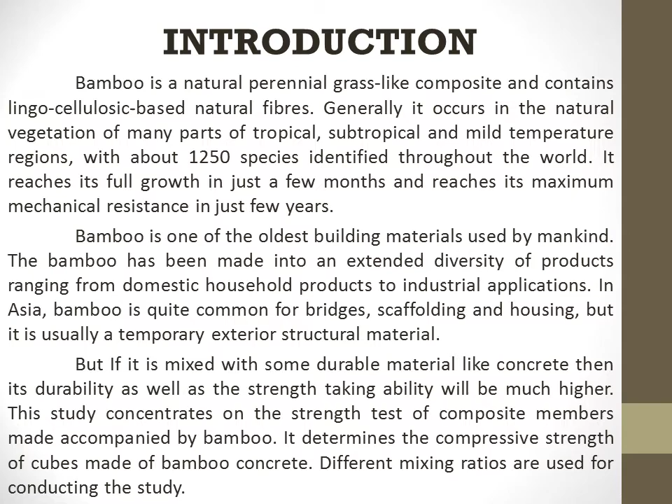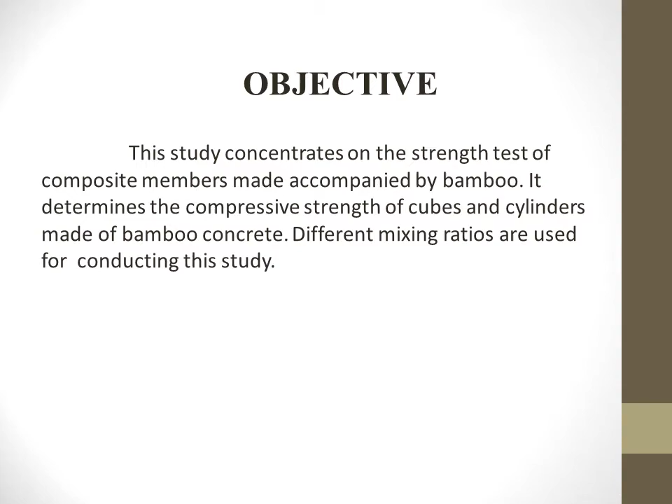The objective of our study is to find out the strength test results and compare nominal mixed concrete with fiber mixed concrete at different mixing ratios.

These are the materials which we used for concrete: Cement of 53 grade, JP branded, fine aggregate from river sand free of moisture, 20 mm coarse aggregate, water complying with the pH level, and bamboo as fibers.

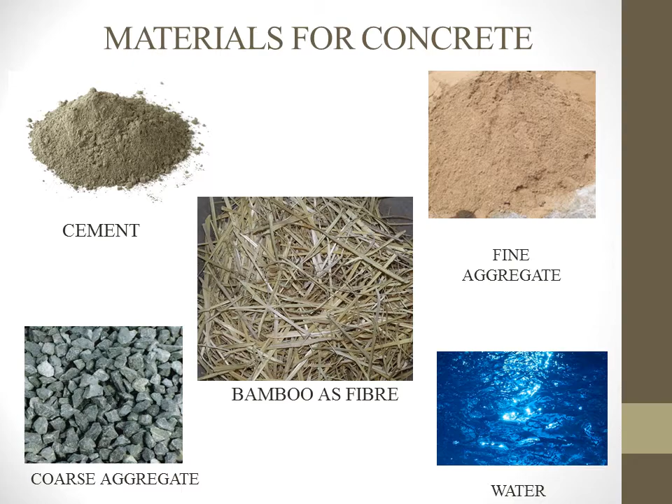This is the literature review of Harish and Vamsi Krishna in 2012 on the topic investigation on properties of bamboo as reinforcing material in concrete. They found out the various physical and mechanical properties of bamboo for use as reinforcement in concrete. He concluded that the strength of bamboo is about 125 Newton per mm square.

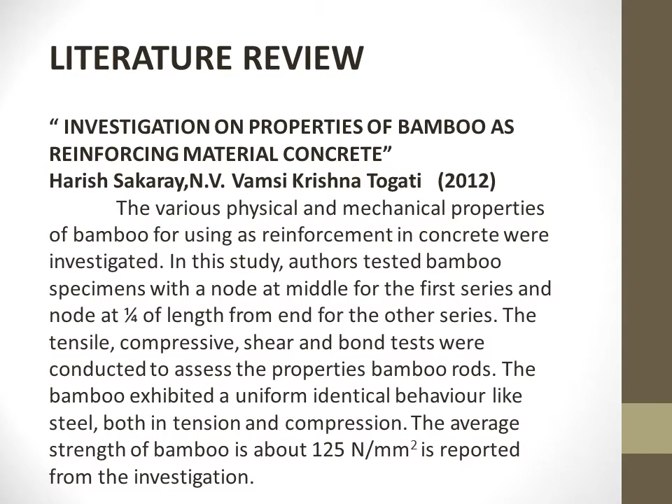This is the journal by Liu and Zjou on the title Study on the Mechanical Properties of the Bamboo Fiber Reinforced Cement Composite Materials. They cut the bamboo into 10 mm, 15 mm and 20 mm length fibers and mixed it with concrete. He casted the cubes and put them to compressive strength test, pre-treated them, and concluded that there is an increase in rupture strength because of the pre-treatment done to the bamboo.

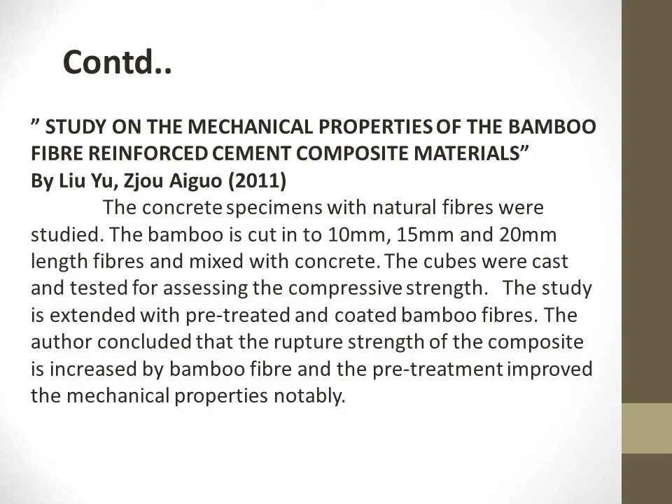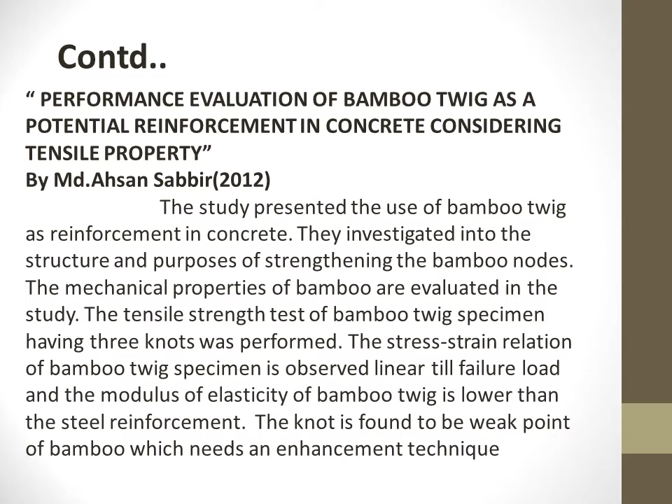This is another journal on the title Performance Evaluation of Bamboo Twig as Potential Reinforcement in Concrete Considering Tensile Property, by Md. Ahsan Sabbir in 2012. The study presented the use of bamboo twig as reinforcement in concrete. The tensile strength test of bamboo twig specimen having 3 knots was performed. The stress-strain relationship of the bamboo twig specimen is observed linear till failure load, and the modulus of elasticity of bamboo twig is lower than steel reinforcement. He concluded that the knot was found to be the weak point of bamboo, which needs enhancement.

This is another journal on the title Durability Analysis of Bamboo as Concrete Reinforcement by Lima in 2008. The analysis investigated the durability of bamboo used for concrete reinforcement. He found that the average bamboo tensile strength was 280 megapascals without node and 100 megapascals with node.

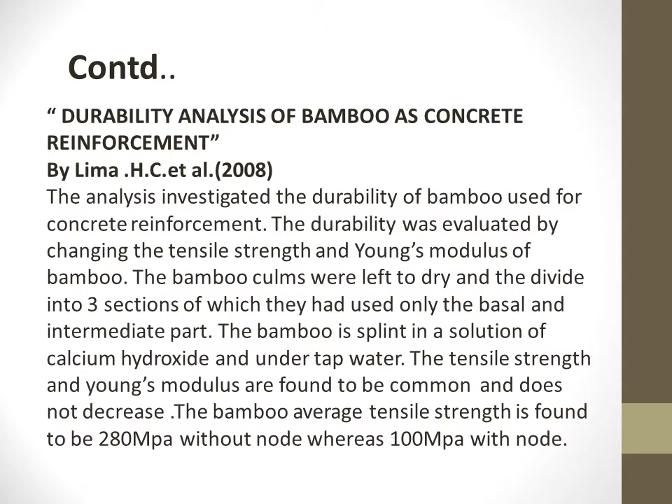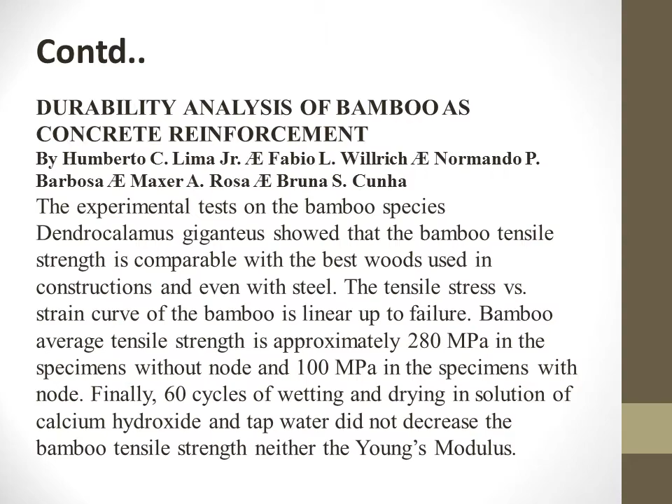Then he wanted to find the durability of that bamboo fiber. He put the bamboo into 60 cycles of wetting and drying, and found that there was no decrease in the bamboo tensile strength, nor in the Young's modulus.

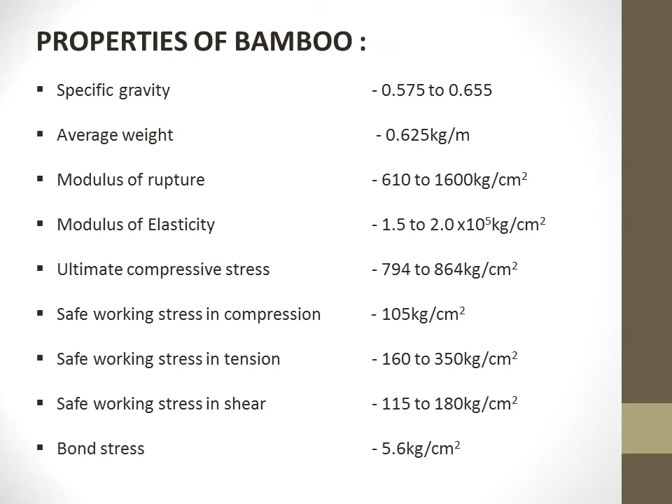This is our methodology for this experimental study. We first collected resources and studied the materials. We casted cubes and cylinders with nominal mix and fiber mixed concrete, then put those specimens through compression strength test and split tensile strength test. We then compared the results of nominal mixed concrete and fiber mixed concrete, came to a conclusion, and prepared the report.

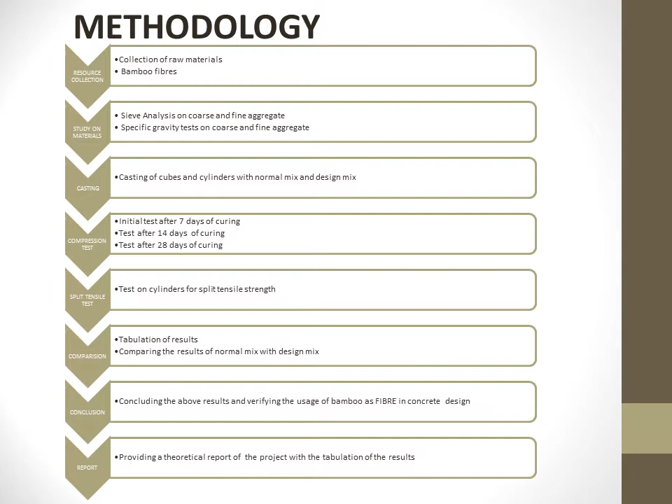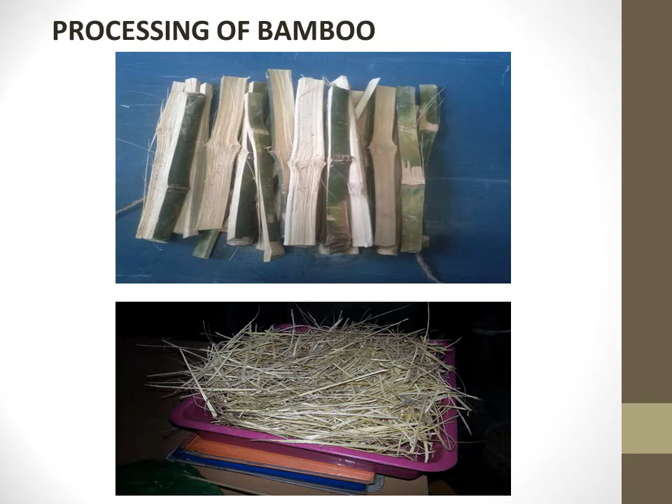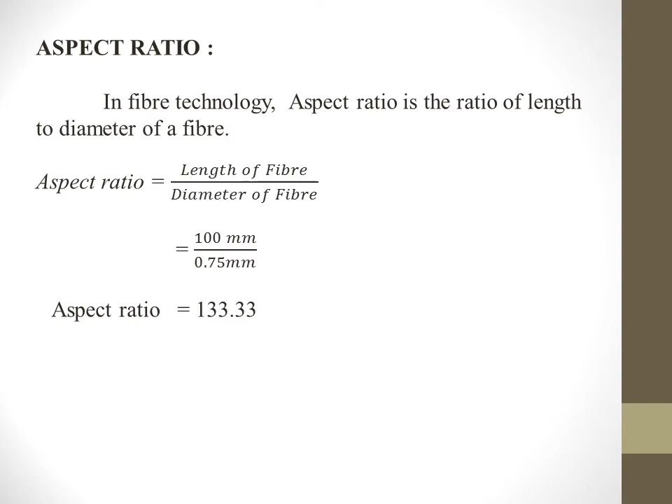This is how we had processed the bamboo. The bamboo was cut into small pieces of around 30 centimeter height, and then we had put the bamboos into fibers manually. We had taken around 10 to 15 bamboo fibers done manually, and found that the length of those fibers was around 100 mm, and the diameter of the fiber was 0.75 mm. Thus the aspect ratio was 133.33.

Then we had done the study on those materials. We had done sieve analysis for coarse and fine aggregate with the usage of these sieves which you are looking at, and also we had done specific gravity test on coarse aggregate and fine aggregate.

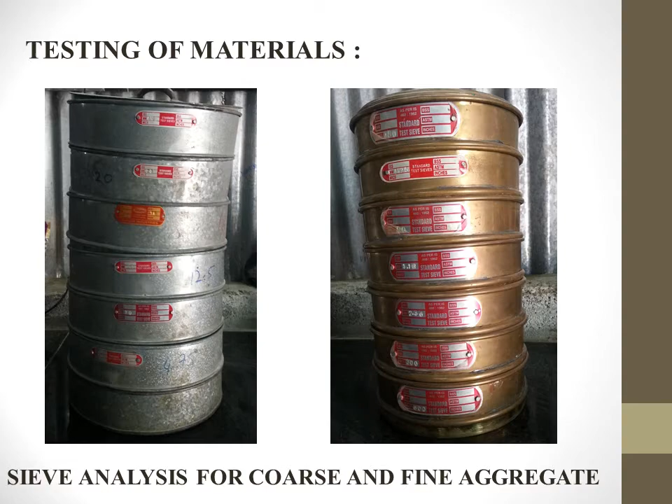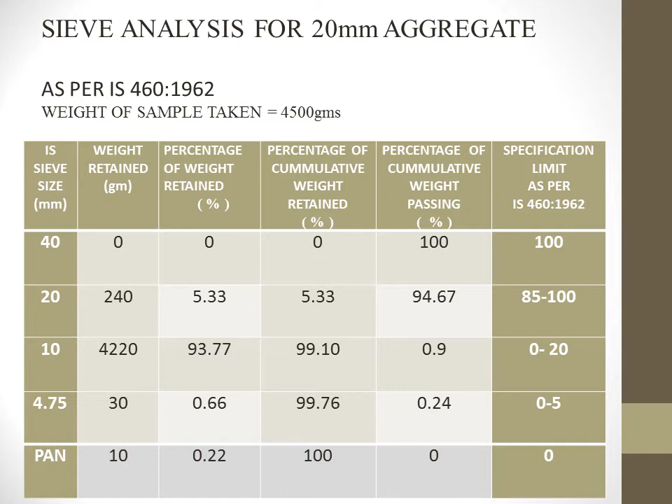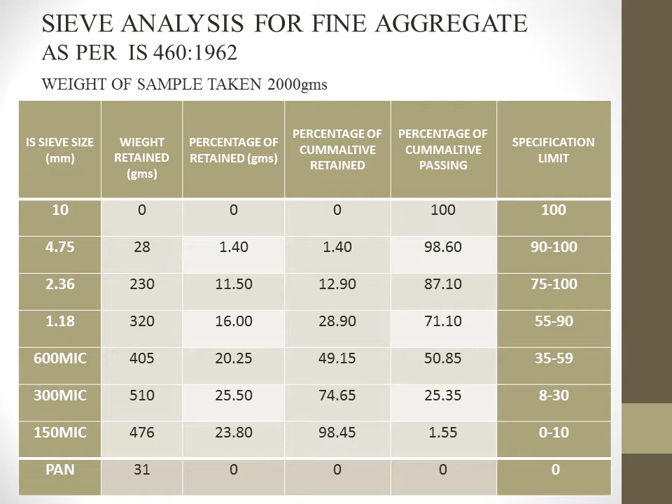This is the tabulation for sieve analysis on 20 mm aggregate as per IS 460 in the year 1962. We had put the 20 mm aggregate into various sieves ranging from 40 mm to 4.75 mm, and they had all complied with the specification limit as per IS 460 1962. We also did sieve analysis for fine aggregate with sieves ranging from 10 mm up to 150 microns, and they also complied with the specification limit of IS 460 1962.

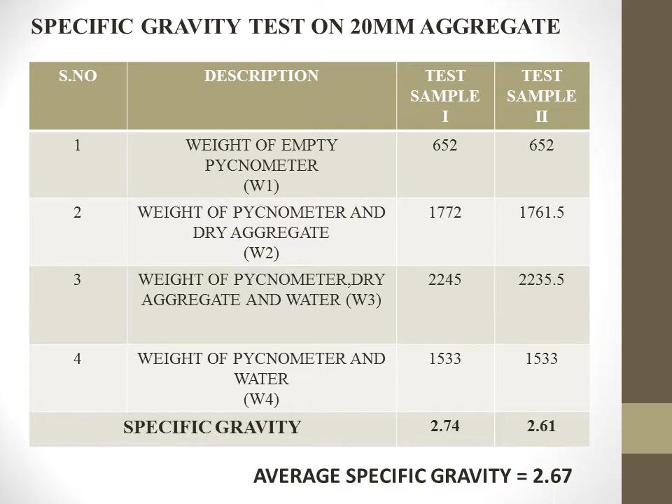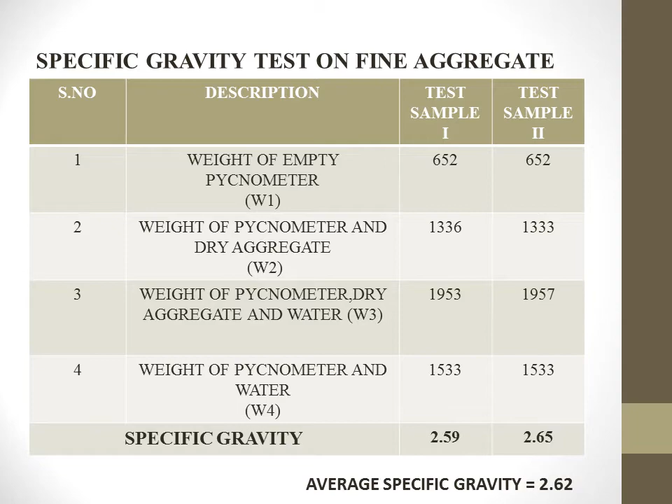Now we had come to the design procedure, that is M25 mix design. Based on the materials which we have and the specific gravity and other properties of the materials, we had done the design procedure to find out the mix proportions.

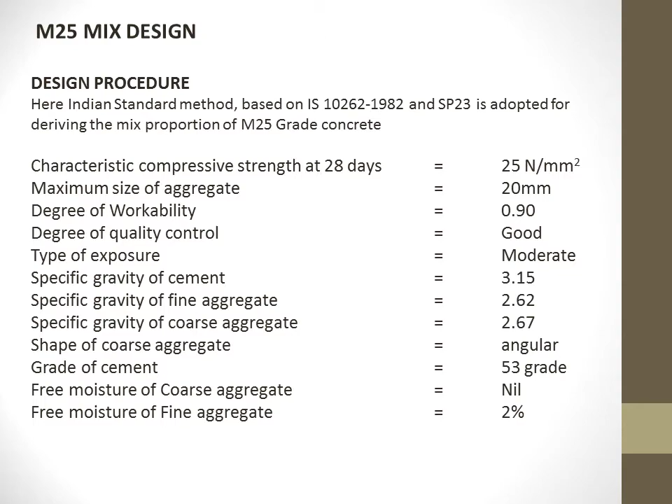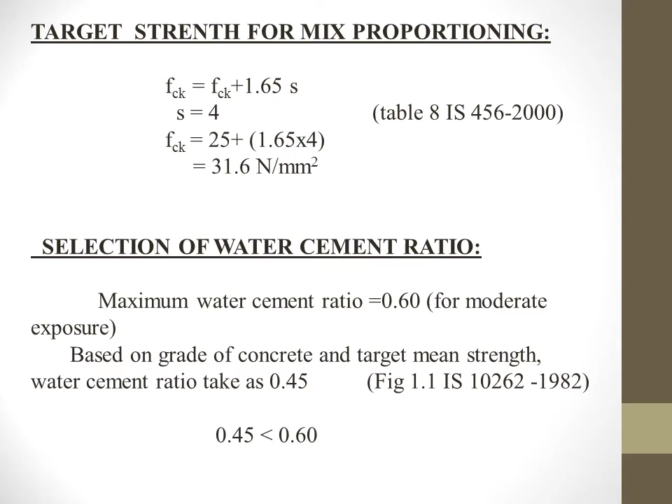The degree of workability is 0.9. The degree of quality control was good, and moderate exposure was there, and the specific gravity of cement was 3.15. The specific gravity of fine aggregate and coarse aggregate were inferred from the previous test which we had done, and the values were taken as 2.62 and 2.67 respectively. The grade of cement is 53 grade. The target mean strength was found to be 31.6 Newton per mm square. The water cement ratio we had taken as 0.45, which is lesser than 0.6.

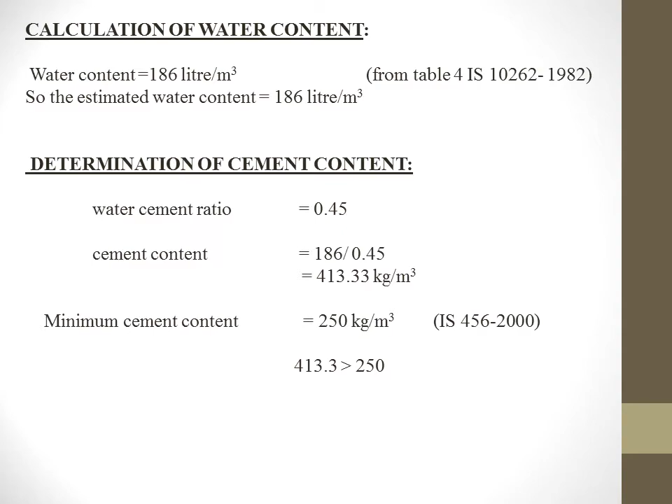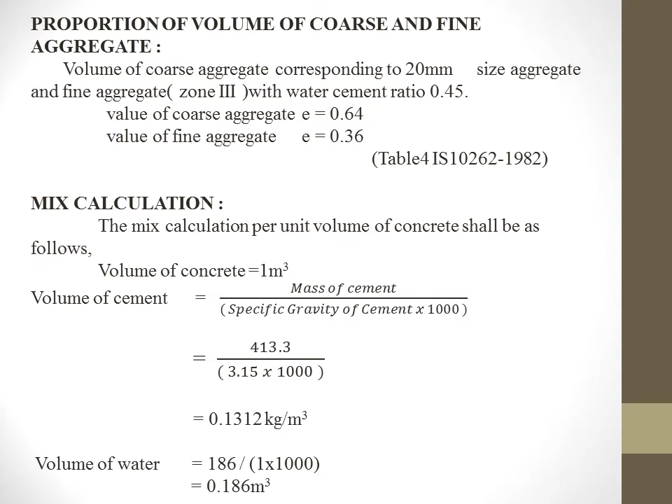Now we had come to the determination of cement content. We had determined the cement content from the water content and the water cement ratio, and the value of cement content was found to be 413.33 kg per meter. From the previous value of coarse aggregate and fine aggregate in table 4 of IS 10262 1982, we had found the volume of coarse aggregate to be 1166.768 kg per meter cube, and the volume of fine aggregate was 644.017 kg per meter.

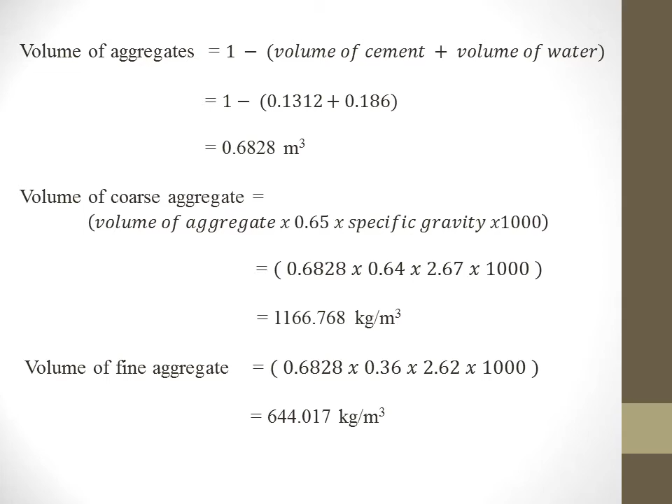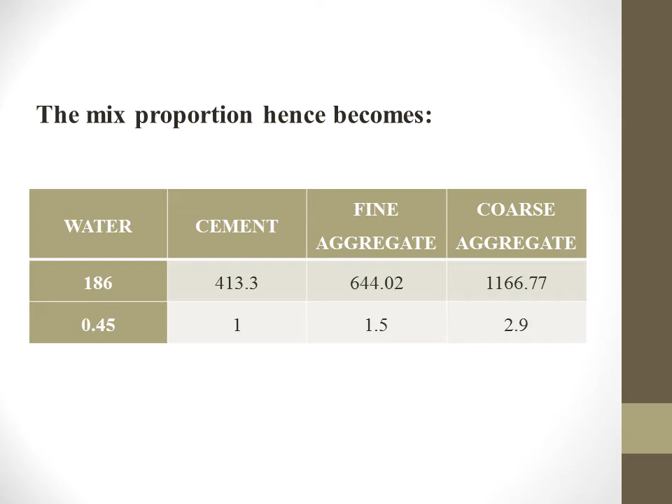Now we had come to the final part of our design procedure, and the mix proportion was successfully found out. The proportion was 1 part of cement with 1.5 parts of fine aggregate with 2.9 parts of coarse aggregate along with 0.45 parts of water.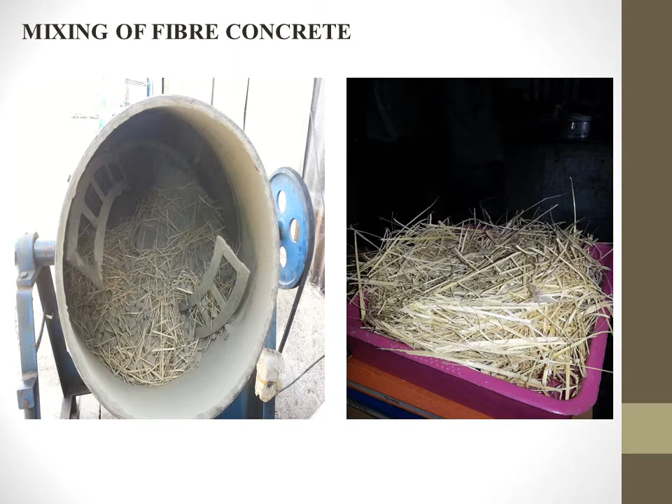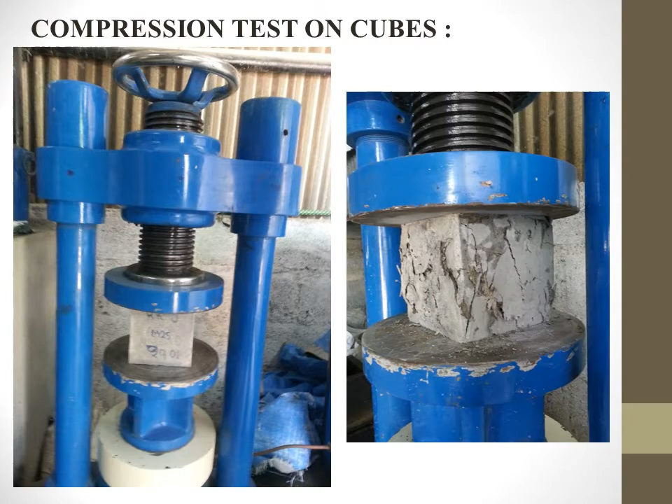As you can see, we had used a mixer for mixing of fiber concrete. Cubes were casted and cylinders were also casted. We had put the cubes for compression strength test, and as you can see, the pattern of failure is shown in this picture.

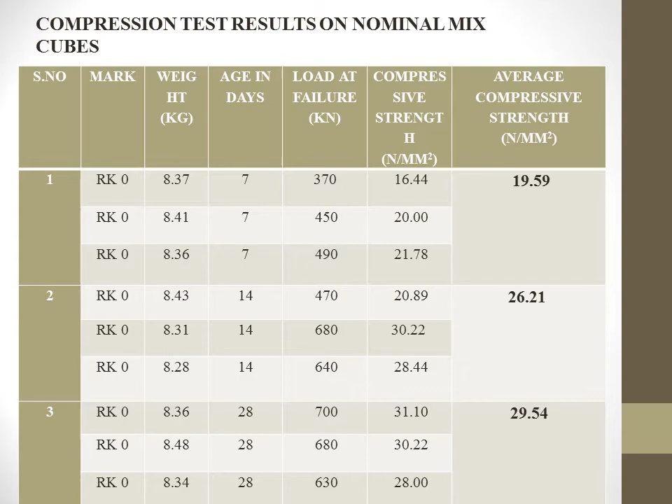These are the tabulation results on compressive strength test on nominal mixed cubes, that is without any fibers. We had used only coarse aggregate, fine aggregate, water and cement, and the strength after 28 days of curing was found to be 29.54 Newton per mm.

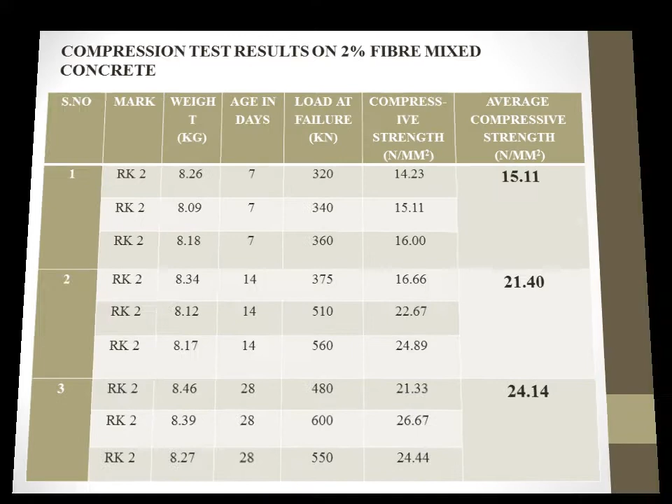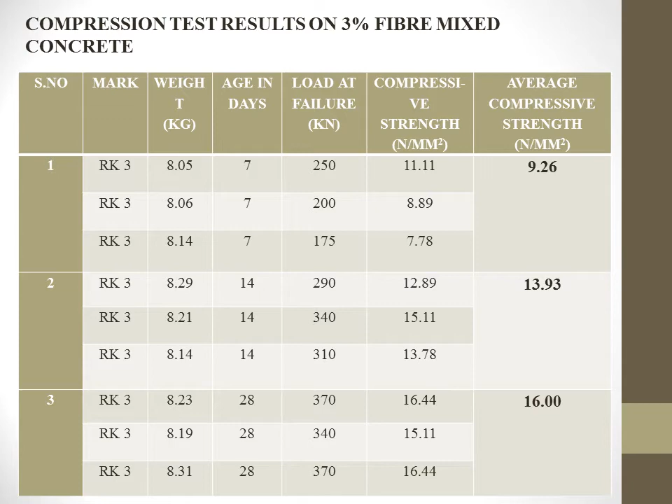This is the comparison tabulation. As you can see, with 0% fiber content, the strength of the concrete was 29.54, and with 1% addition of fiber content, the value increased from 29.54 to 32.59. There was a nominal decrease with 2% addition of bamboo fibers, and a drastic decrease in compression strength with 3% addition of bamboo fiber.

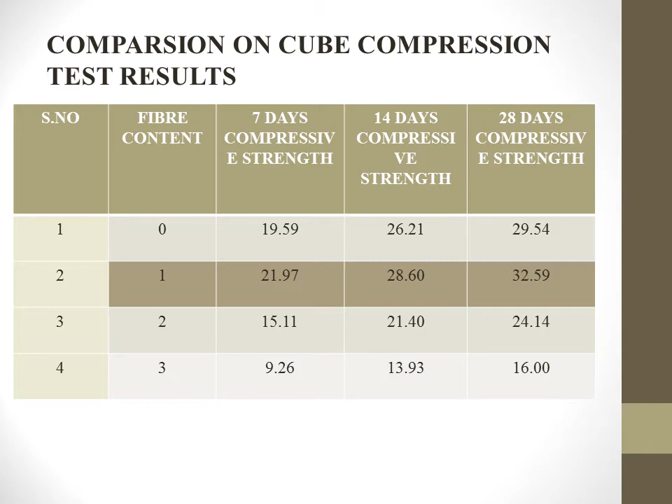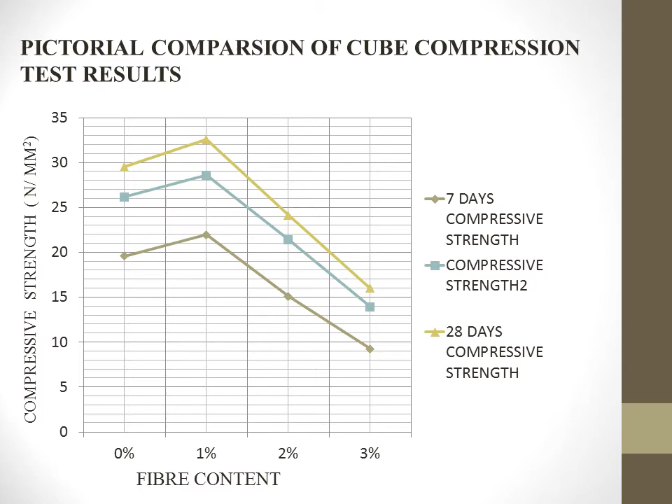As you can see in the graph, there is an initial increase, meaning an increase with 1% of bamboo fiber, and then there is a gradual decrease for 2% and 3% addition of bamboo fibers.

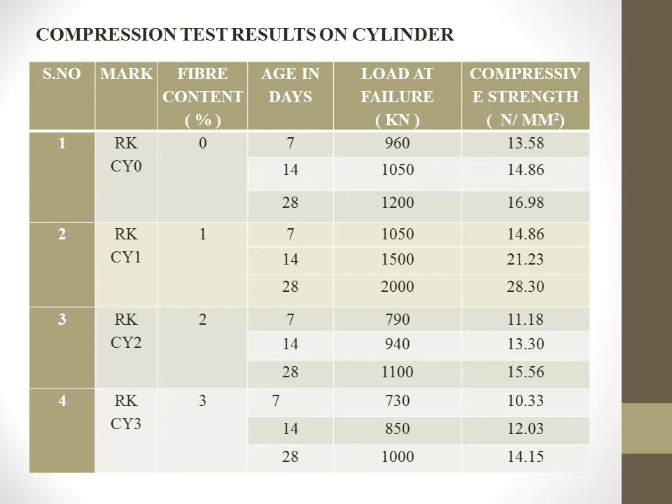As usual, there is a gradual decrease with the increase in fiber content. With 2% addition, the compressive strength was found to be 15.56 after 28 days of curing, and with 3% addition of bamboo fiber, the compression strength had decreased to 14.15 Newton.

With the increase of 1% fiber content, there is a huge increase in the compressive strength of the cylinders after 28 days of curing. It increased from 16.98 to 28.3, and then with the increase in fiber content, there is a decrease in the compressive strength.

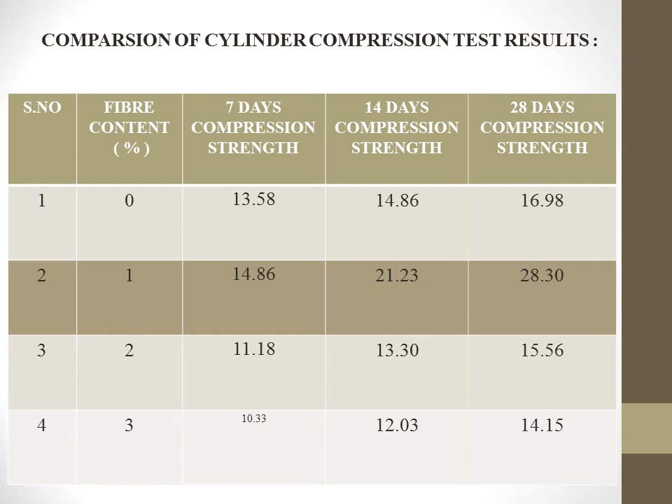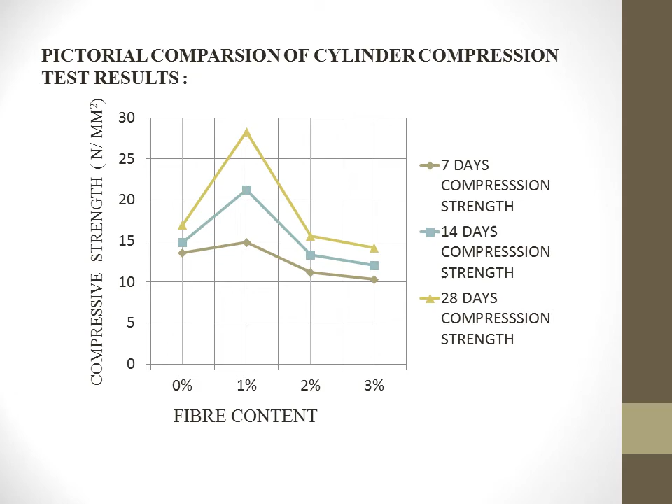As you can see, there is a great jump from 0% of fiber content to 1% of fiber content, meaning there is a huge increase in the compressive strength of cylinder specimens with 1% addition of bamboo fiber, and then there is a gradual decrease along with 2% and 3% of fiber content.

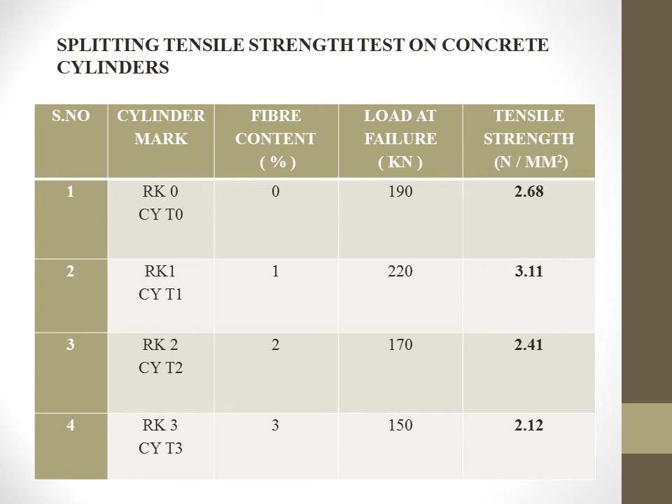Then we had also done split tensile strength tests on cylinder specimens. The nominal split tensile strength with nominal mix was found to be 2.68 Newton per mm square, and with 1% addition of bamboo fiber, the tensile strength increased from 2.68 to 3.11 Newton per mm square. It then slightly decreased with 2% addition of bamboo fiber to 2.41 Newton per mm square, and further decreased to 2.12 Newton per mm square with 3% addition of bamboo fiber.

This is the formula which we used for finding out the tensile strength. TSP, which is the tensile strength, is equal to 2 times the load at failure divided by the diameter of the cylinder into length of the cylinder into pi.

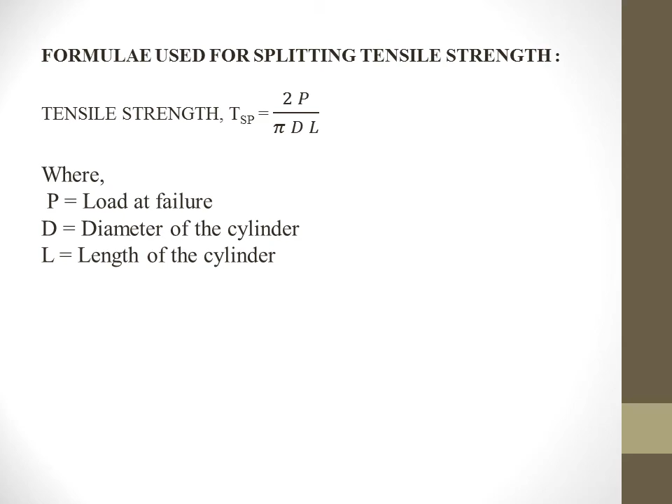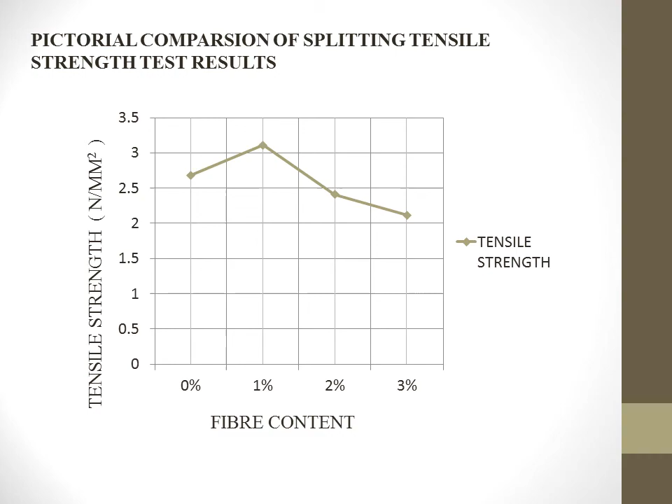This is the pictorial representation of split tensile strength test results. As you can see, there is a slight increase with 1% of fiber content, and then there is a gradual decrease with increase of fiber content.

Hence, we have come to the conclusions of our experimental study. I'd like to conclude by saying that cube compression strength increases by nearly 10 to 15 percentage with 1% addition of bamboo fibers, and it is found to decrease by approximately 7 to 9 Newton per mm square for 2% addition of bamboo fibers. It also decreased drastically by 12 to 15 Newton per mm square for 3% addition of bamboo fibers.

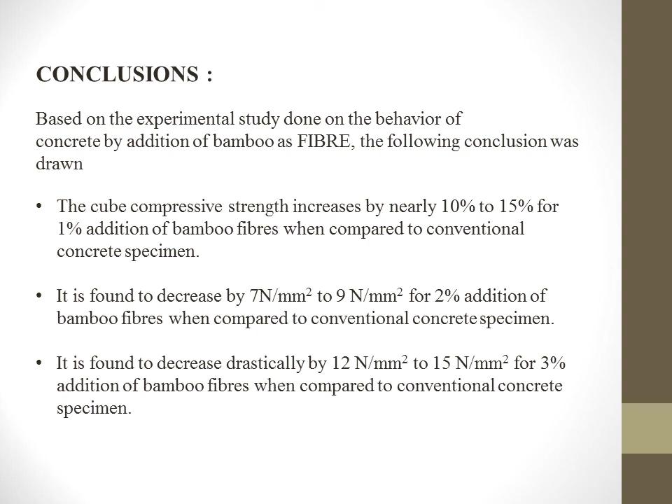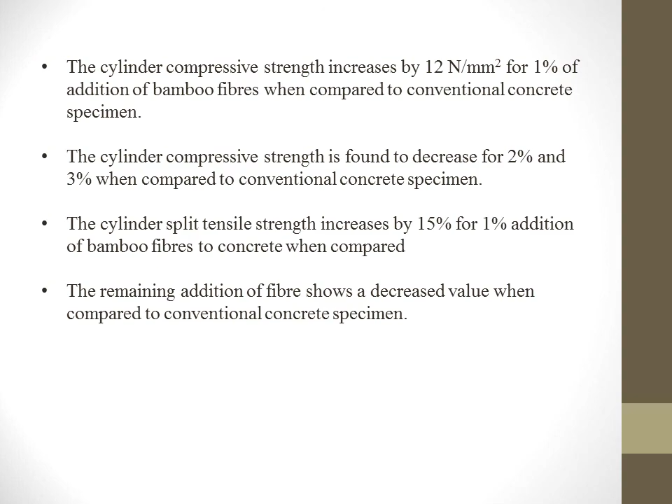The cylinder compressive strength increased by 12 Newton per mm square with 1% addition of bamboo fibers, and the cylinder compressive strength is found to decrease for 2% and 3% respectively. The cylinder split tensile strength increases by 15% for 1% addition of bamboo fibers, and as usual with the remaining addition of fiber, there is a decreased value of split tensile strength.

Thus, I'd like to say that 1% addition of bamboo fiber has shown a positive trend. It is evident from the previous charts and graphs that the addition of 1% bamboo fiber increased the strength of the concrete. Hence, our experimental study has paved a path for an exclusive study of bamboo as fiber in concrete technology.